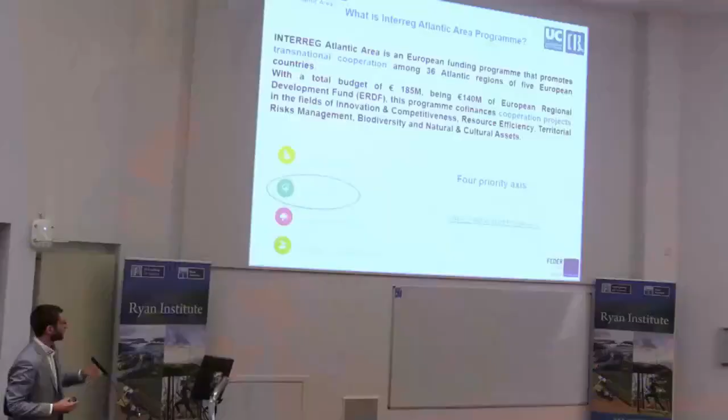The consortium is composed of 4 universities: the University of Cantabria, the coordinator or leader, the University of Porto, Ulster University in Belfast, and Dublin City University. We also have 2 research institutes, the CNRS in France and the LNEG in Portugal, and 5 companies: 3 from the UK, Ulenco, Auriga, and Pure Energy Center; Asilva Matos in Portugal, and Apria System from Spain, represented here by Esther Santos. The budget is about 2.5 million euros.

We also have many associate partners from different associations or organizations.

The main goal of the Hylantic project is to establish an excellent transnational network to advance the research and development of renewable hydrogen generation and recovery from industrial waste streams. We also want to have innovative and safe hydrogen storage systems, and the competitive implementation of high-efficiency, low-cost energy systems with fuel cells and internal combustion engines.

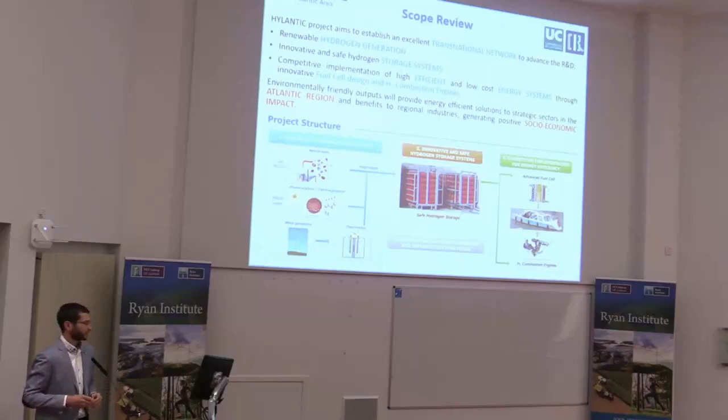These targets aim to generate a positive socioeconomic impact in the Atlantic region, for regional industries and society.

The duration of the project is 3 years. It started in October 2017 and will finish in September 2020.

Besides the 3 basic work packages—coordination, communication, and capitalization—there are 4 technical work packages, as I mentioned before. Now I'll give some examples of each one.

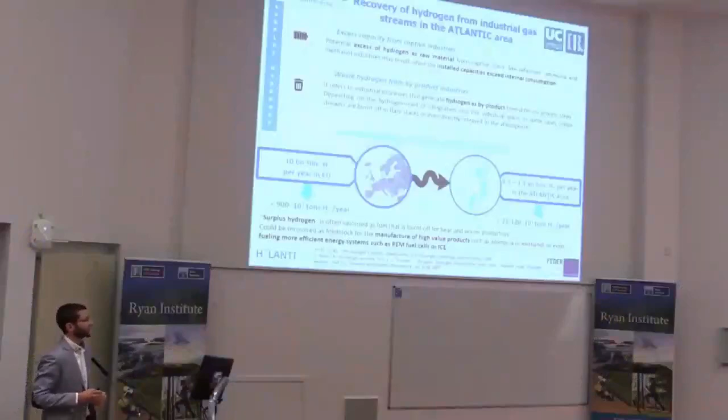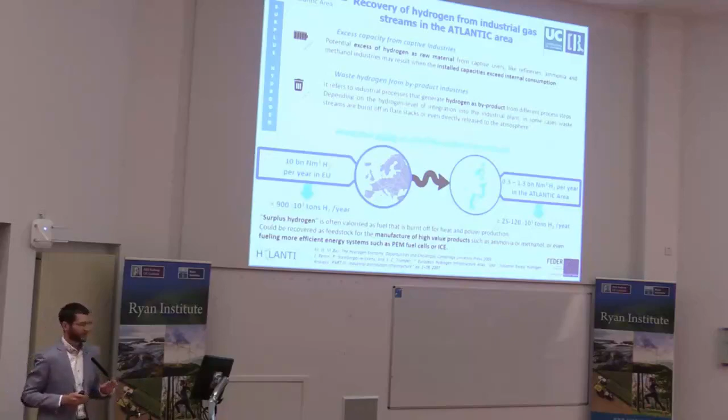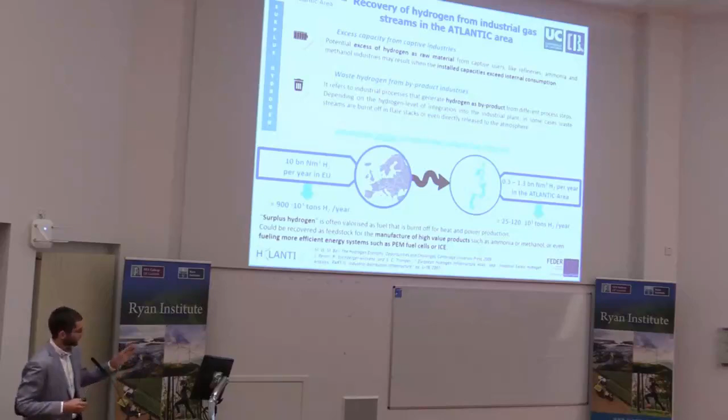Within the first work package, the University of Cantabria has done a study on the recovery of hydrogen from industrial waste streams. This can come from captive industries, where hydrogen is used as raw material but installed capacity exceeds internal consumption, or from byproduct industries, where hydrogen is not used in any chemical process, and could instead be used in more efficient fuel cells, internal combustion engines, or to manufacture high-value products. There is an estimation that hydrogen losses in the European zone are around 900,000 tons per year, and in the Atlantic area, around 100,000 tons per year.

The main industries that can be used for this are steel plants, which produce coke oven gas mainly composed of hydrogen, around 50 to 60%, methane, and some carbon monoxide. Refineries produce methanol and syngas. Chloralkali plants have very pure hydrogen, more than 99%, and there's also hydrogen from ammonia plants.

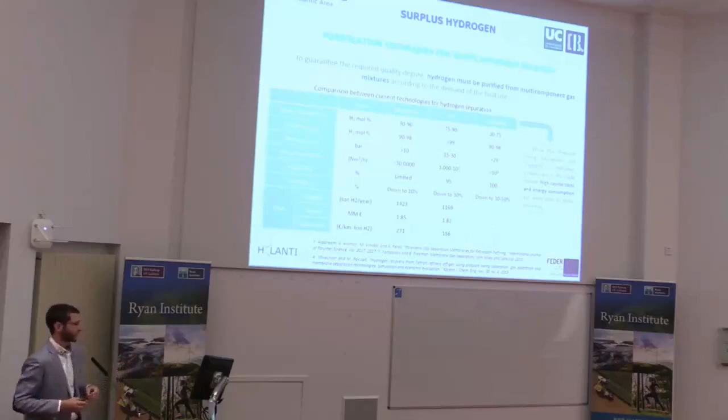There are different technologies to purify these waste streams, such as membranes, pressure swing adsorption, or cryogenic distillation. However, the last two have high capital cost and energy consumption.

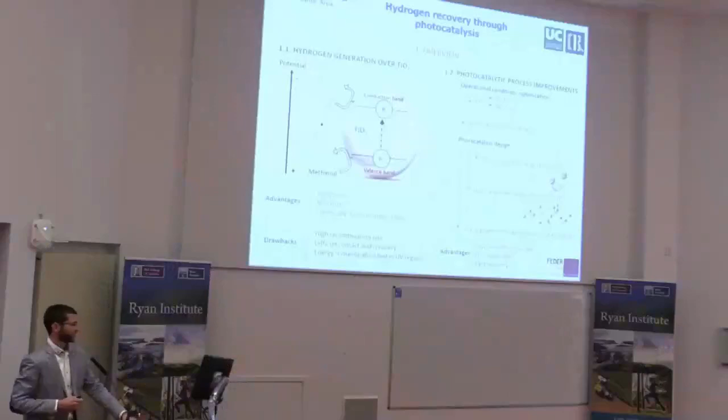Another way to recover hydrogen is with photocatalysis. This is based on photoactive particles, such as titanium dioxide. When light excites these particles suspended in solution, an electron-hole pair is created, and the electrons combine with the solution, producing hydrogen and oxygen, which can be separated with membranes. It's an inexpensive, non-toxic, and chemically stable technology.

However, there are some drawbacks, like high recombination rate, and difficult contact and recovery. To improve this process, you can optimize operational conditions like pH or photocatalyst concentration, or use different materials like graphene oxide or platinum nanoparticles, which are more expensive.

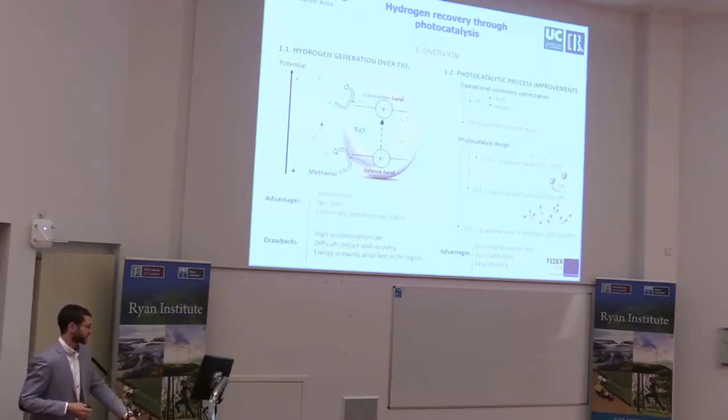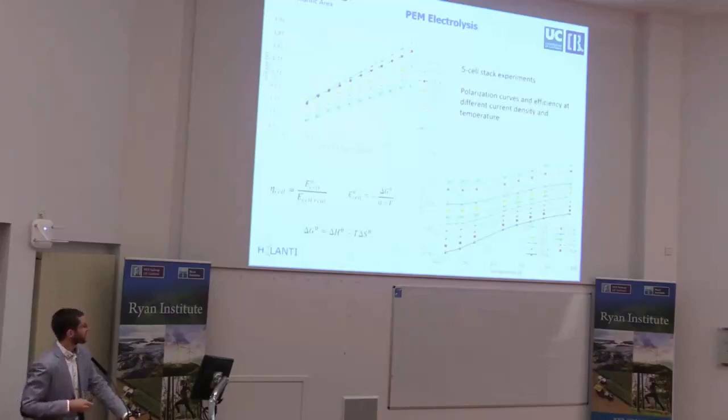Another option is to produce hydrogen from renewable energies. For this reason, the University of Cantabria has bought an electrolyzer with a stack of 5 PEM cells, or a single PEM cell, to test different cells, membranes, and catalysts. These are some examples of the results on polarization curves and efficiency at different current densities and temperature.

On the other hand, the University of Porto has developed a CFD model of a PEM electrolyzer. First, a preliminary version, more simple, and now we'll develop a second version with a more realistic geometry, with degradation mechanisms included and more complete.

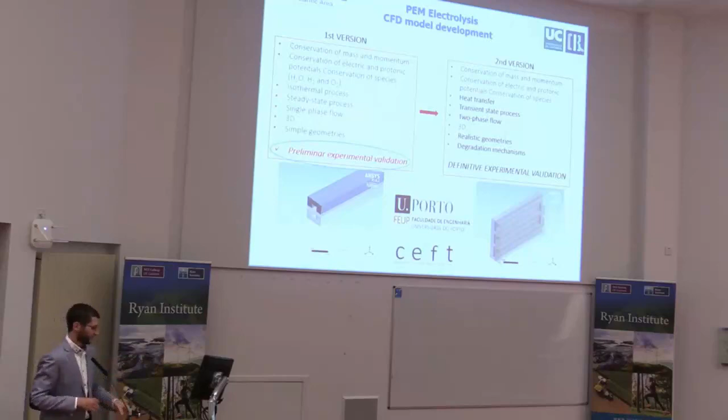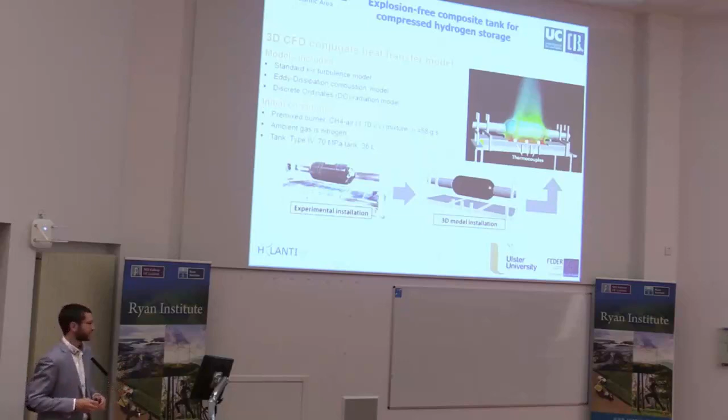Within the second work package, the Ulster University, which is specialized in safety hydrogen, are doing many tests at different conditions, different fire attacks, and also developing a 3D CFD model to validate the experiments.

They have patented an explosion-free composite tank for compressed hydrogen storage. The 3 layers are: an inner layer that is impermeable to gas, but at a determined temperature becomes gas permeable, around 120 degrees; an intermediate layer, which bears all the internal pressure, at least 700 bar; and an outer layer, which is thermally protective, lowering the thermal conductivity of the intermediate one.

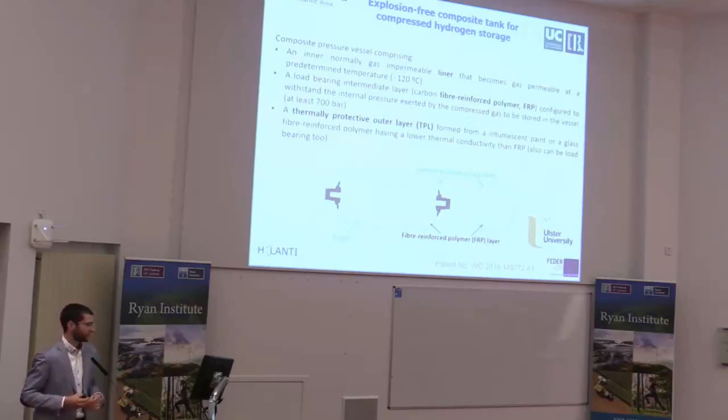When the vessel is attacked with fire, the outer layer reduces the degradation of the intermediate layer so it can withstand the internal pressure until the liner reaches the determined temperature of 120 degrees. It melts, and then the gas can vent through the whole surface, and the pressure is reduced in a controlled and relatively safe manner. So there is no explosion.

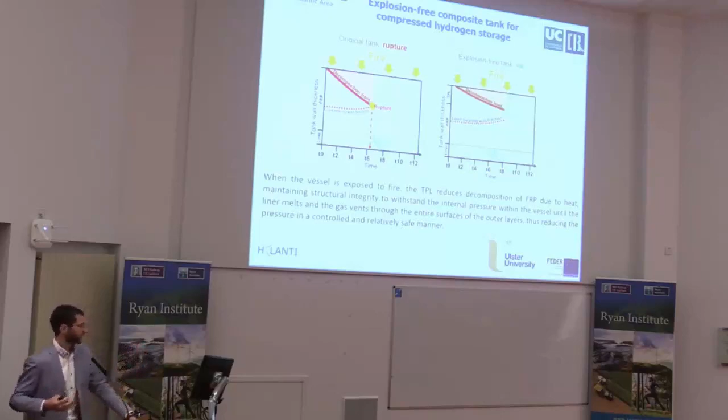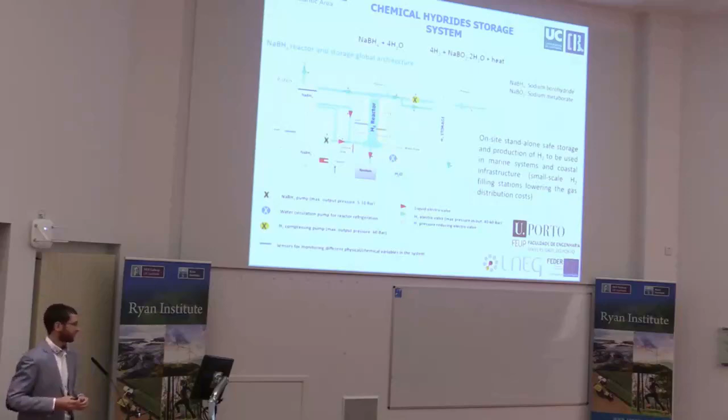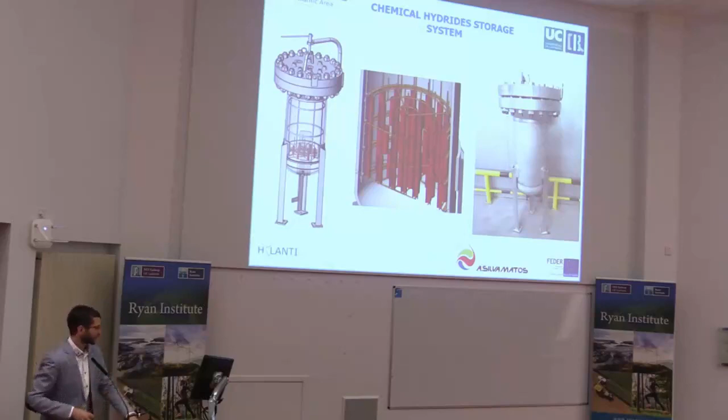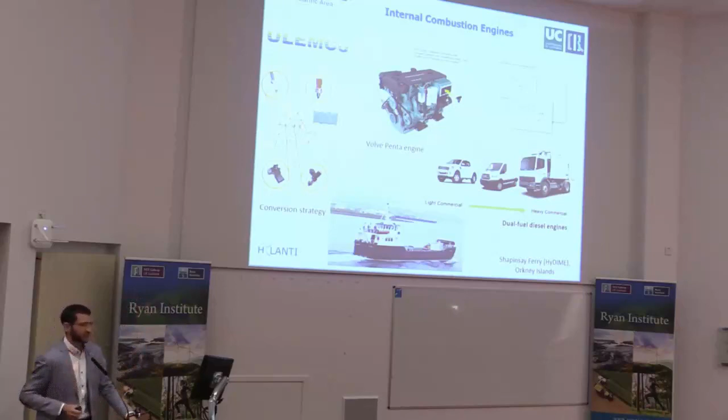Within the third work package, the ULEMCo company are studying the implementation of diesel dual fuel engines, first in light commercial and heavy commercial trucks and vans with a conversion strategy, and will do the same with a Shapinsay ferry in the Orkney Islands. They are also testing a 100% hydrogen engine with 6 cylinders in their test laboratory to promote high performance and efficiency with low emissions.

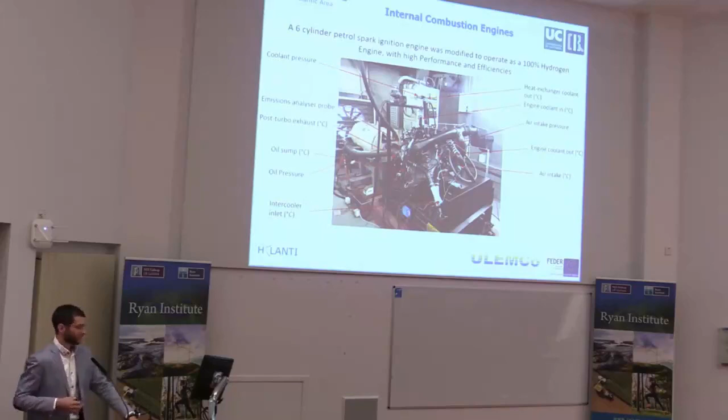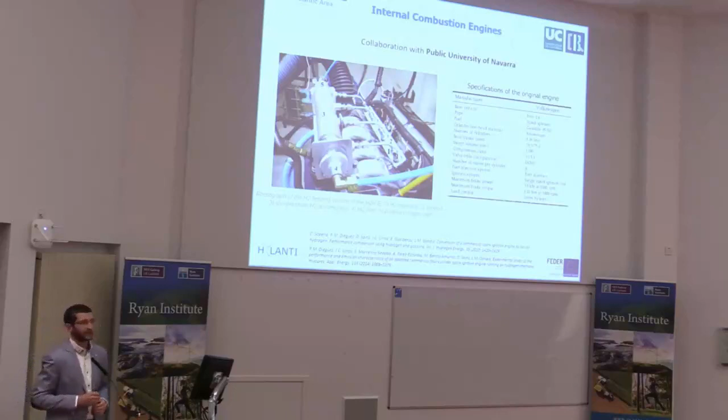On our side, the University of Cantabria has set up a collaboration with the Public University of Navarra on a Volkswagen Polo 1.4-liter spark ignition port fuel engine. It had been converted to work with hydrogen, methane, or gases.

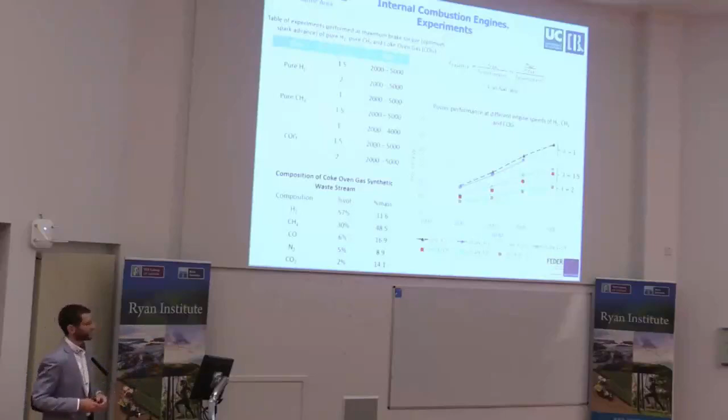And we've done some experiments with pure hydrogen, pure methane, and coke oven gas. Coke oven gas, as we said, has 57% hydrogen, 30% methane, 6% carbon monoxide, and some inert gases. The first experiments have been done, and we can see the power performance is very good with coke oven gas.

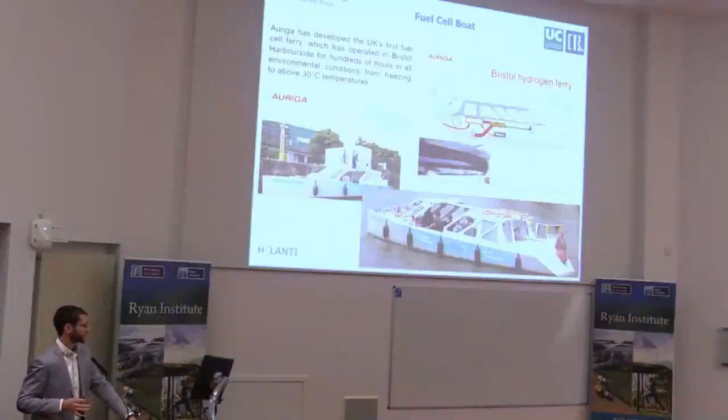On the other hand, for fuel cells, Auriga has developed the UK's first fuel cell in Bristol, and it has been operated for hundreds of hours in all environmental conditions, from freezing to above 30 degrees.

Finally, in the last work package, Apria Systems, Esther can you tell more about this, has done 2 surveys to review the state of knowledge on hydrogen risk, cost, and benefits in this area. One has been done as a general public survey, and the other to stakeholders.

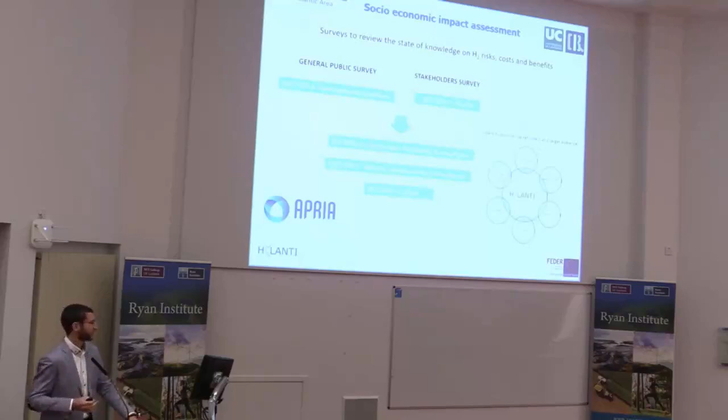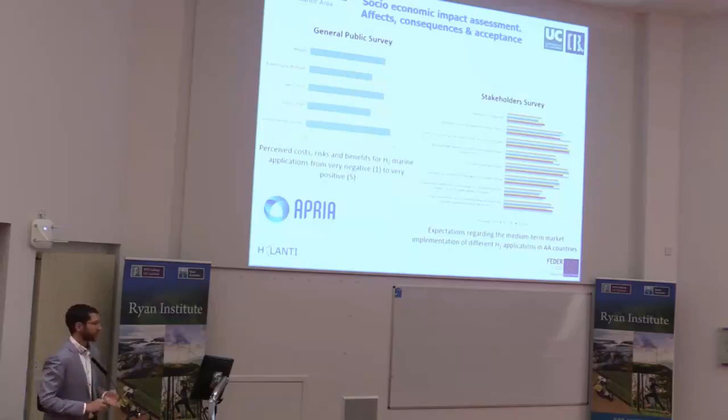For example, the perceived costs, risks, and benefits for hydrogen marine applications for the general public survey has been very positive. And for stakeholders, the expectations regarding medium-term market implementation has been focused more on portable power generators, vehicles, and hydrogen refueling stations.

They will also do a life cycle assessment of fuel cells for the implementation.

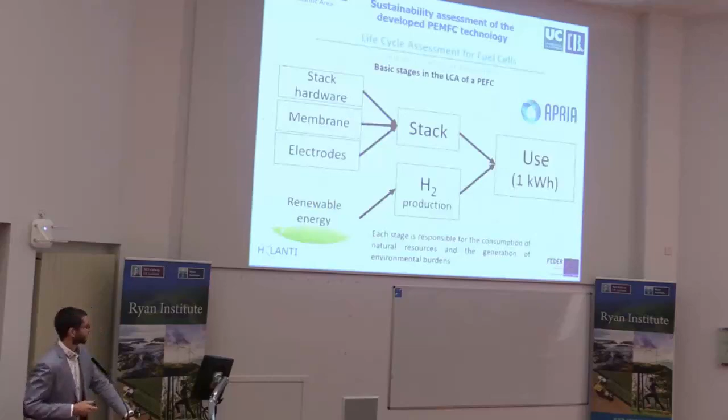To finish, I would just like to invite you to the International Summer School in Hydrogen and Fuel Cell Technology in Portugal, from 22 to 26 of June 2020, organized by Alexandra Pinto. It will be based on hydrogen fuel cells fundamentals, hydrogen production and storage, devices and applications, mobility, advanced materials, modeling, safety, and life cycle assessment.